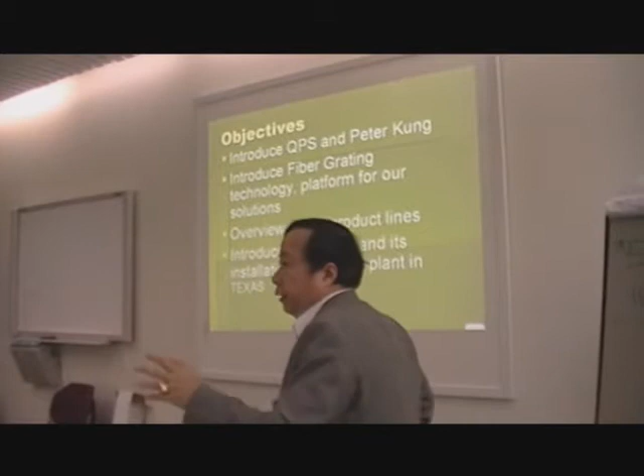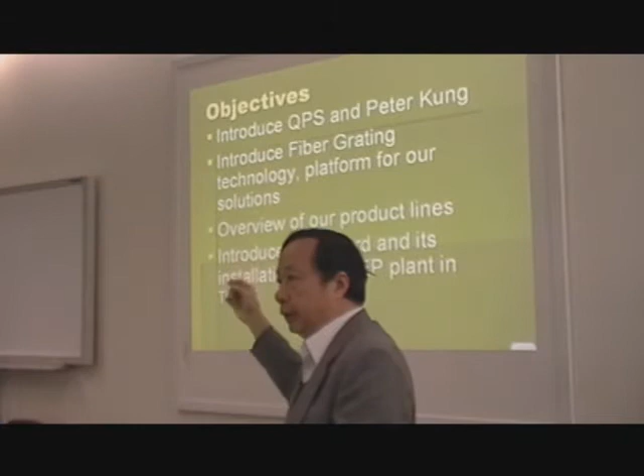So the objective of the presentation today is to let you know about our company and myself. I am of the semiconductor background, started at Motorola in Phoenix back 25 to 30 years ago. And it's because of that semiconductor background I was able to pick up the area of photonics technology. In fact, I contributed to the evolution of that technology that gave rise to today's telecom, where you can now make phone calls very cheap, 2-3 cents a minute, so we played a crucial role in that.

And the technology we want to discuss today is called fiber grating.

And this is analogous to the transistor, invented way back when, 50 years ago. We see this as an enabling technology to be adapted in all kinds of industry.

Now, we pick the power industry because some of the inherent benefits are uniquely suited, I will go through these to explain to you, and then give you an idea of our product line. We have several different product lines targeted at different types of users. And then we'll introduce you to our new solution.

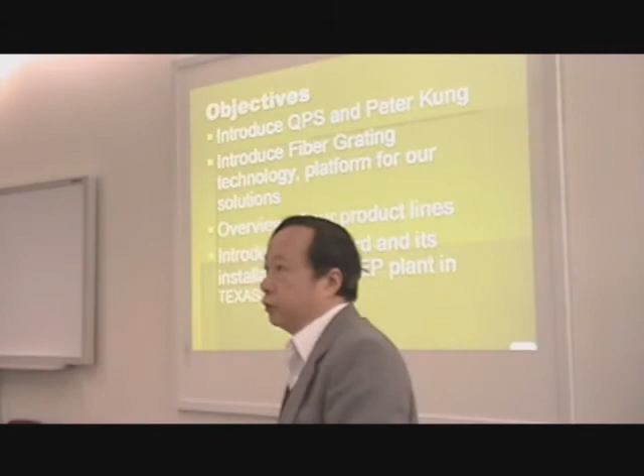This is a world first. There exists a solution that can monitor vibration amplitude growth inside the generator, that exists. However, for the first time, with the same sensor, we can now help you monitor vibration amplitude as well as hotspots. Hotspots that are caused by PD, partial discharge, which is one of the most significant reasons for the failure of generators.

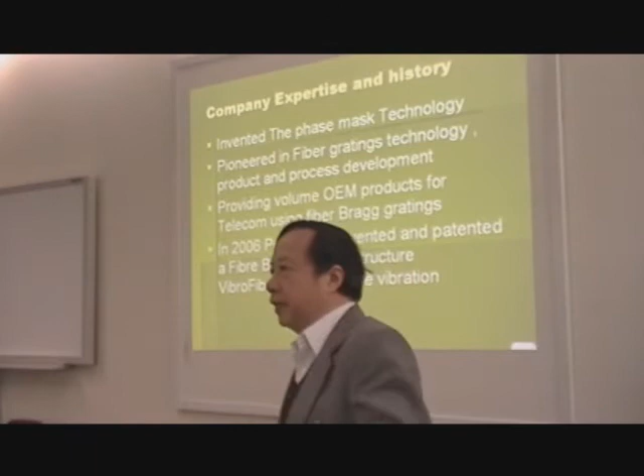I think it's almost set up to do this. Semiconductor background allowed me to make use of very complicated tools, and we invented a tooling for volume production of this technology, called the phase mask.

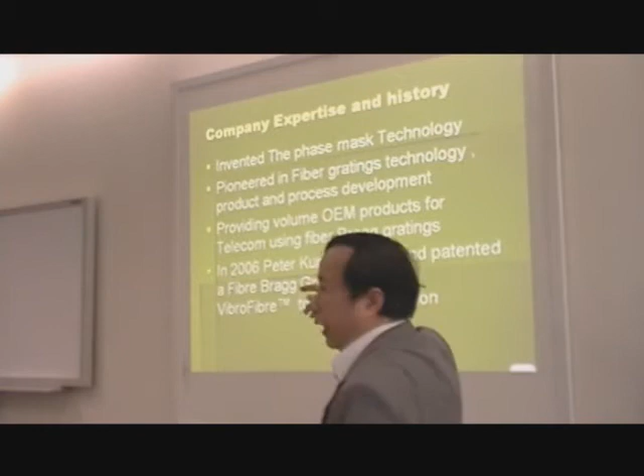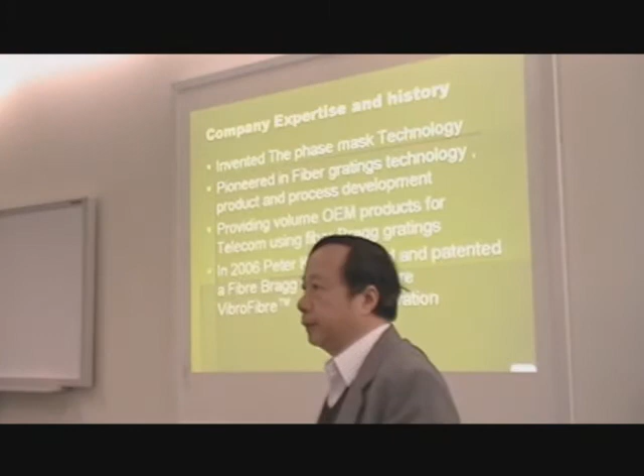Then with that, I learned from the customer how they use it, and I got hooked. And I developed that, and eventually we developed a whole bunch of products enabling telecom to have a 1,000 times increase in throughput. That's what we did. And the customers we sold to are big names like Alcatel, AT&T, all those guys.

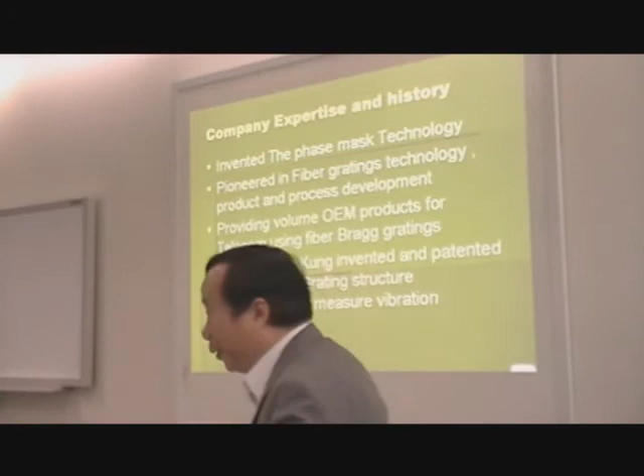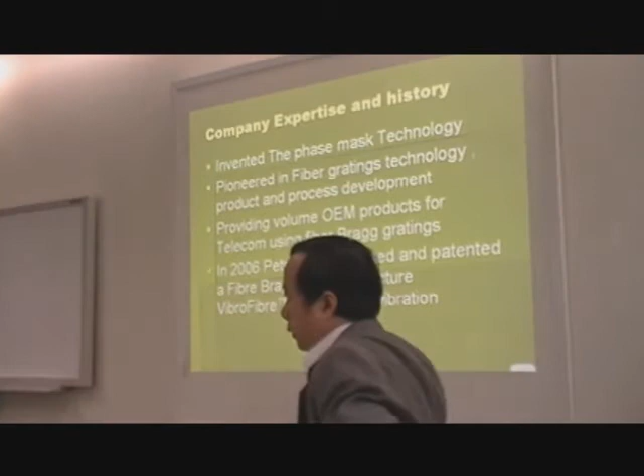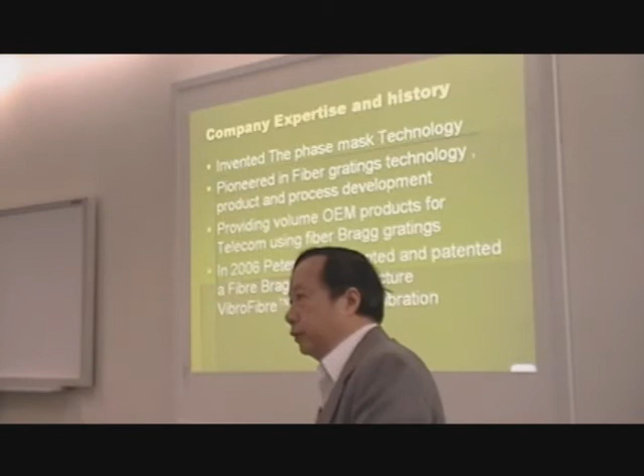By now, unfortunately, they suffer because of the telecom implosion. But at that time, we were shipping something like 8,000 to 10,000 pieces per month. It was an exciting time. And then, of course, the implosion occurred, and we had to reduce the size from a 270 person company down to 18. It was painful.

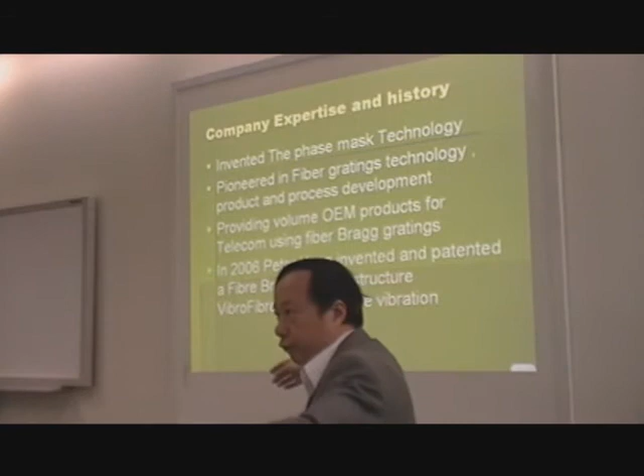And eventually, I said, well, why not take the technology and adapt it to other industries? And so we are starting from scratch, and naturally all the products we developed before are of no use, because these products are basic solutions to address different problems.

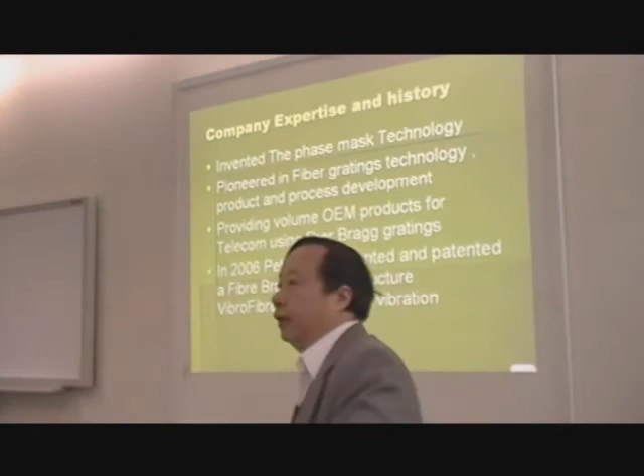So we invented a thing called VibroFibre. The original technology is mainly interesting for measuring temperature and strain in difficult situations, really hostile environments, like in the dam, in ship hulls, the buildings, but rarely do you see a vibration measurement made with this technology. We are the only one.

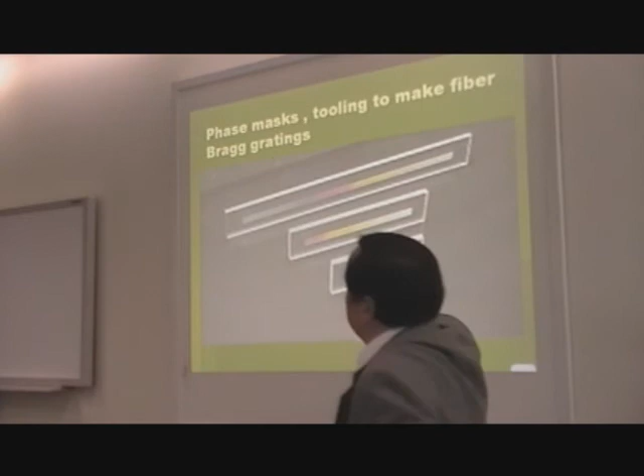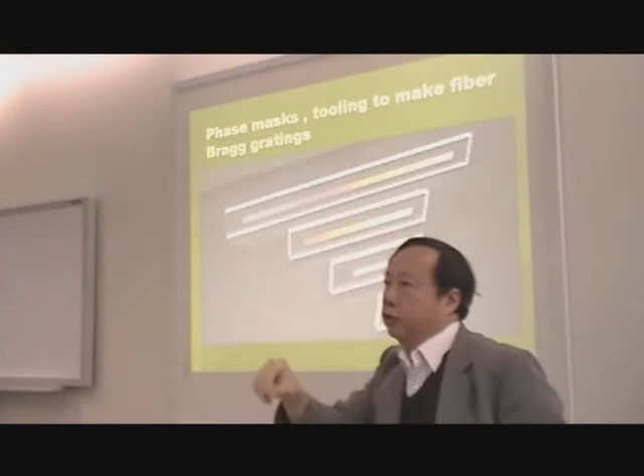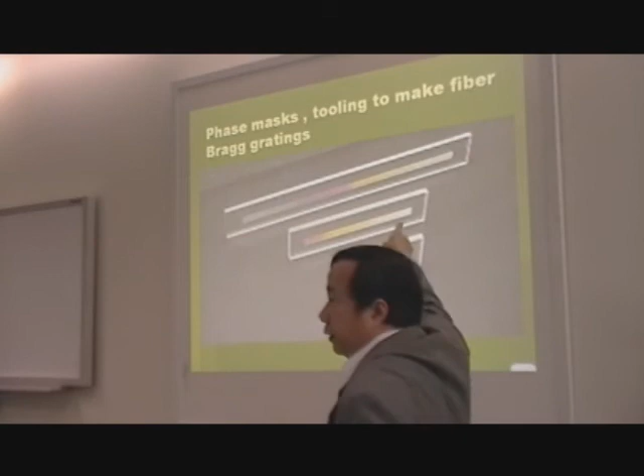So today is this. And what enables volume production is a simple piece of glass like that. You see color fringes over here. It's just because of the semiconductor processing that we did, and the technique is the same as semiconductor people use, but the dimensions are very small. This is the period of what's in here, 1 micron.

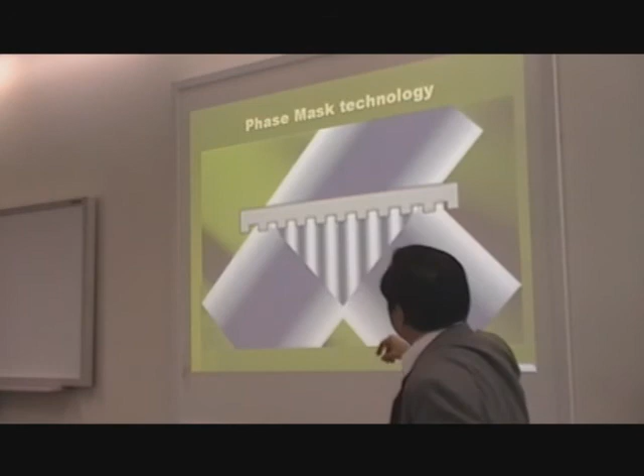You can't see it. Now, how does it work? Well, the phase mask becomes a beam splitter. The light we use is not ordinary light, it's UV.

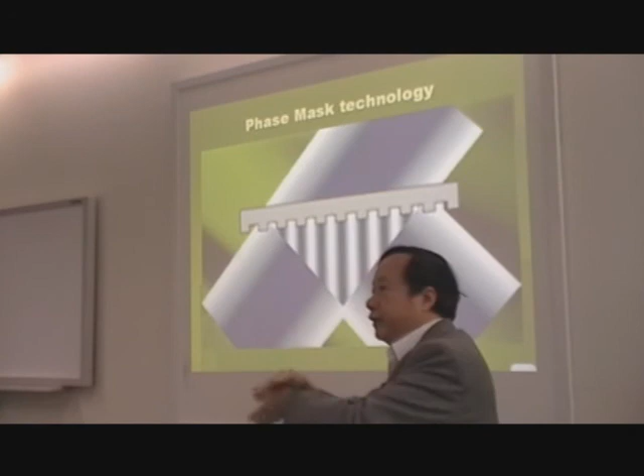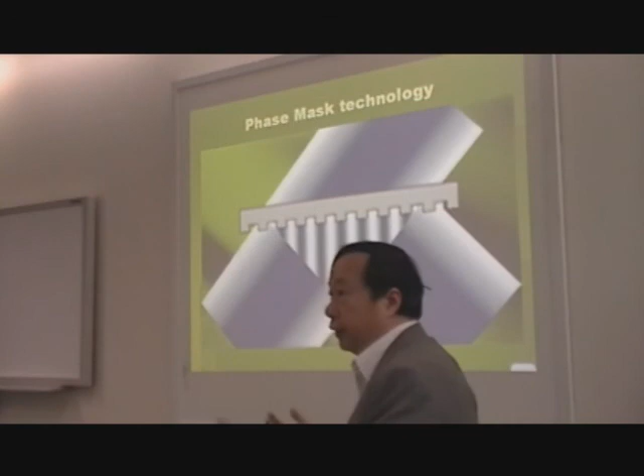This UV light shining onto the optical fiber has the advantage of printing. You see this little gridded region, this is the interference region when the beam got split into 2 different phases. Where they overlap is the interesting region. So we need to put the fiber right behind the phase mask, 200 microns away. Everything we talk about is precision. This is very unique, not something that you can do in a mom and pop shop.

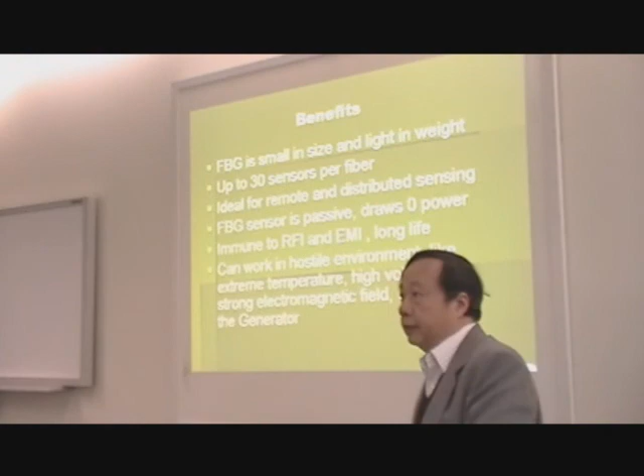So now, here comes the major benefit. You see an optical fiber is kind of as small as your hair, very small, made with glass. Now, that particular nature allows you to place it anywhere you want.